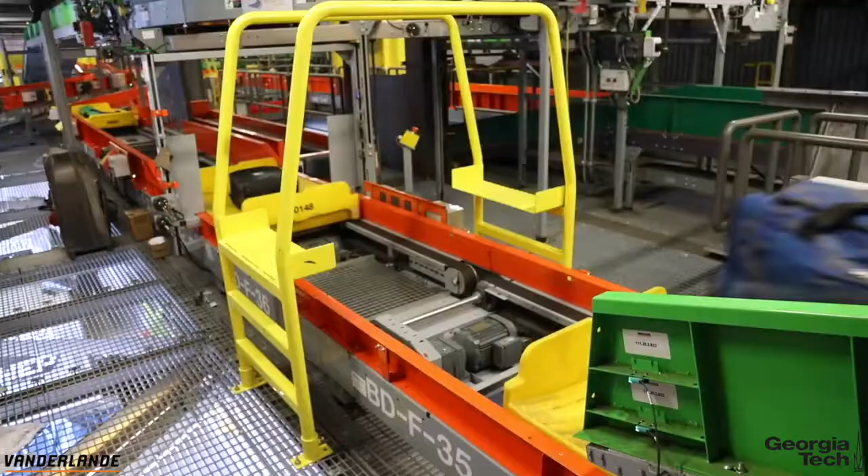Hello, we are Operation Omega, and we're working with Vanderlande, an industry leader in creating logistic process automation via shuttle and conveyor systems. As Vanderlande installs such large transport systems, their process for verifying the structure, components, and throughput can take a long time to complete manually. The process can be accelerated by identifying problems more quickly and reliably.

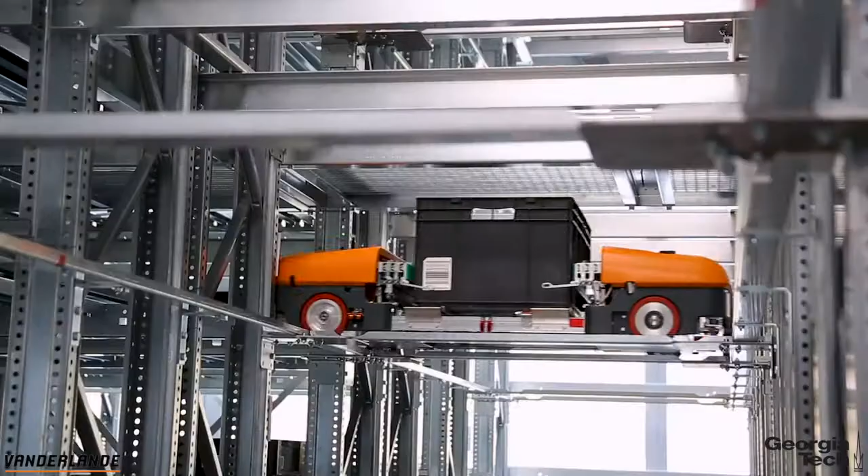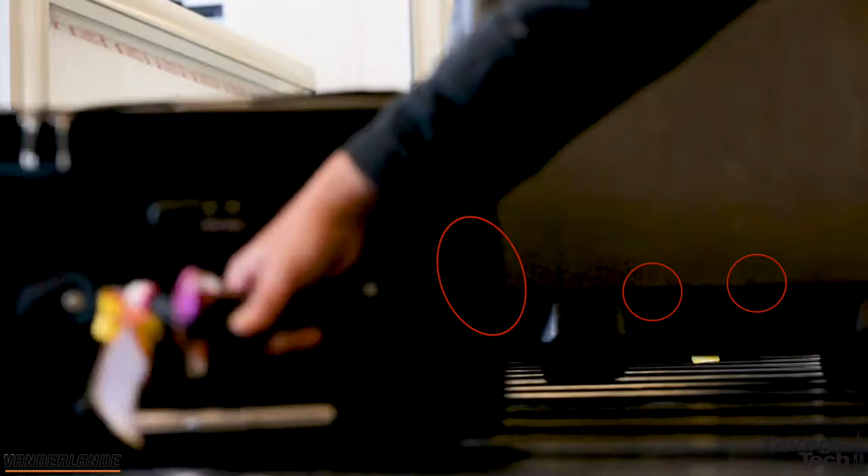For an example of an installation problem that needs to be detected, consider the racking support profiles. One system can have over 100,000 supports, which may be incorrectly assembled up to 1% of the time. This is one problem that needs to be detected in order to speed up Vanderlande's verification. For this reason, Vanderlande desires a more powerful tool, specifically a diagnostic robot, which can move through their structures and assist in quality assurance, ultimately reducing verification time.

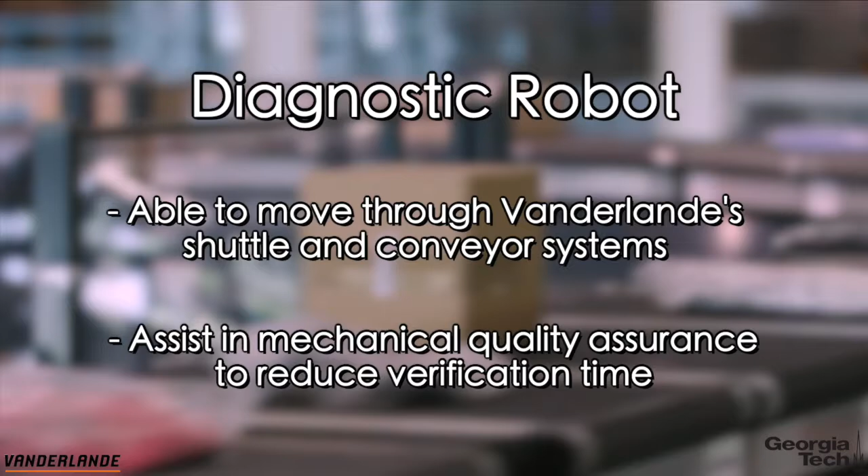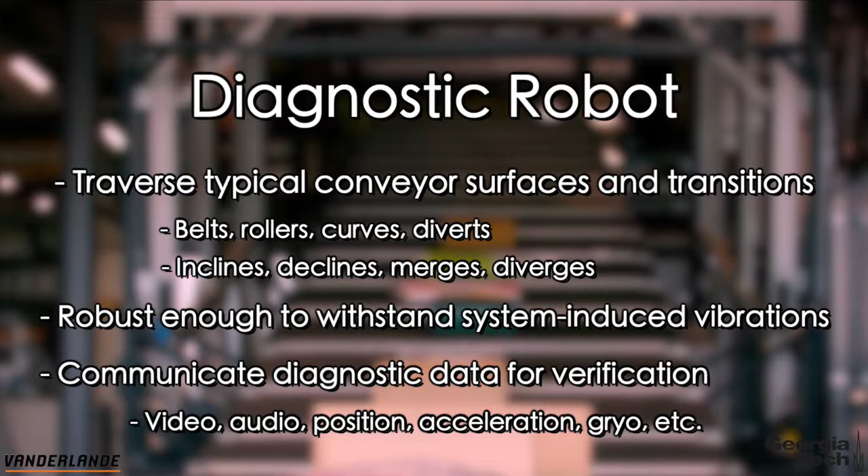This robot solution must be able to traverse Vanderlande's traditional conveyor surfaces and normal transitions, while being robust enough to withstand the vibrations induced by the system. The bot must communicate with Vanderlande operators to provide sufficient diagnostic data, including visuals, audio, position, and appropriate sensors.

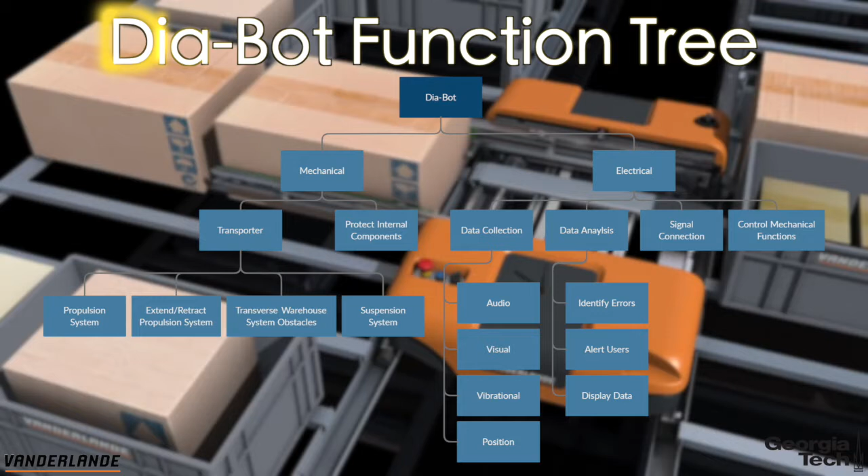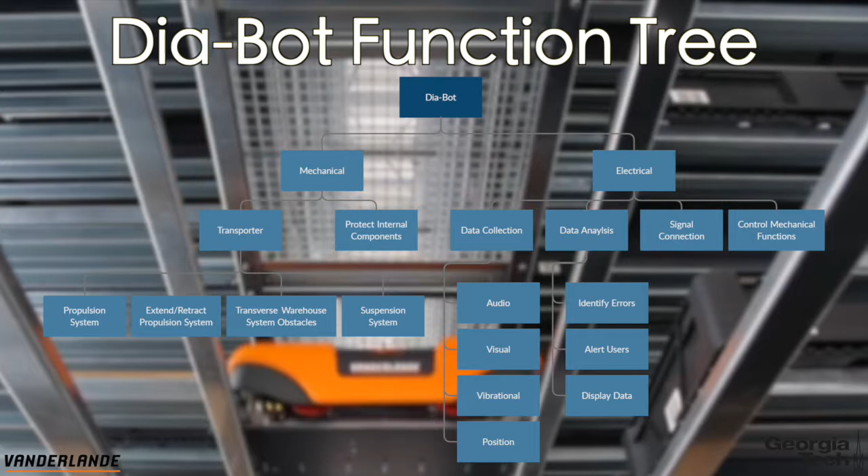To begin design concept ideation, the team first created a function tree to identify the critical functions the Dia-Bot must perform. These functions were broken down into two main functions, being mechanical and electrical. On the mechanical side, two main subfunctions were implemented: the ability to act as a transporter with its subfunctions shown, and the ability to protect the internal components. On the electrical side, the four main subfunctions were data collection, data analysis, signal connection, and the ability to control the mechanical functions.

The design process for the mechanical components began by determining the drivetrains for the Dia-Bot. The two main considerations were continuous track and wheels. The decision was made in favor of continuous track due to the advantage when moving over rough terrain.

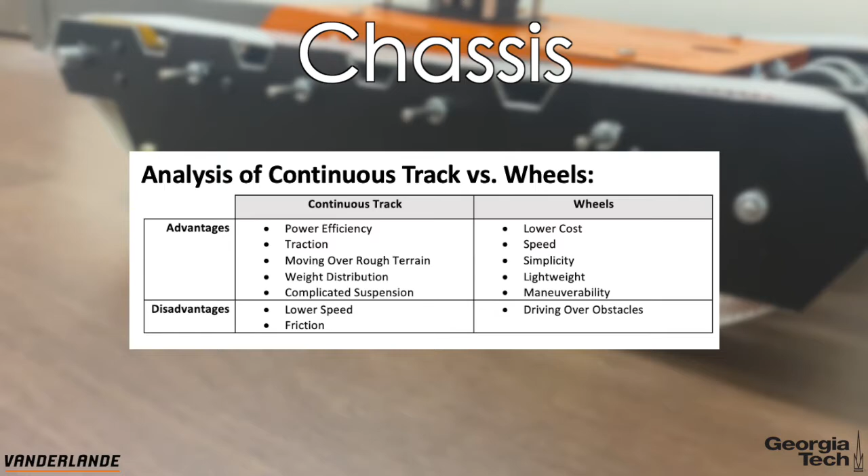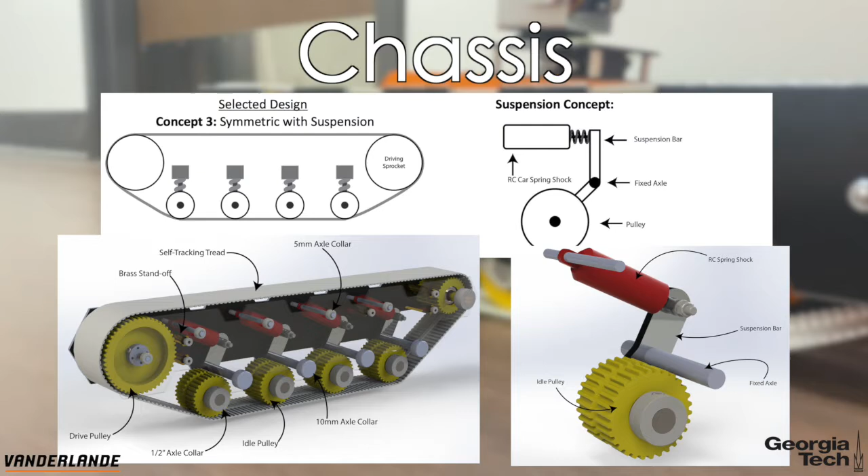Next, a symmetric design with a suspension system was chosen, as our sponsor, Vanderlande, desired for the Dia-Bot to be as versatile as possible. The suspension system works by having a suspension bar rotate around a fixed axle, with one end of the bar attached to the idle pulley while the other end is attached to the spring shock. As a force is applied to the pulley, the suspension bar rotates around the fixed axle and the spring shock dampens the force.

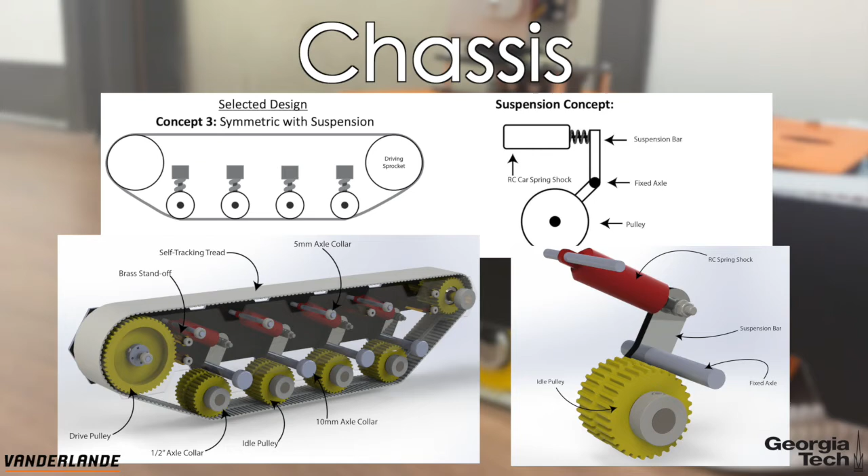For the drivetrain, a self-tracking tread was used that meshes with the pulleys. This prevents the tread from sliding off the pulleys as the Dia-Bot turns. Overall, the biggest challenge for the chassis wasn't the technical design, but sourcing and integrating cheap components so that the Dia-Bot remained under budget.

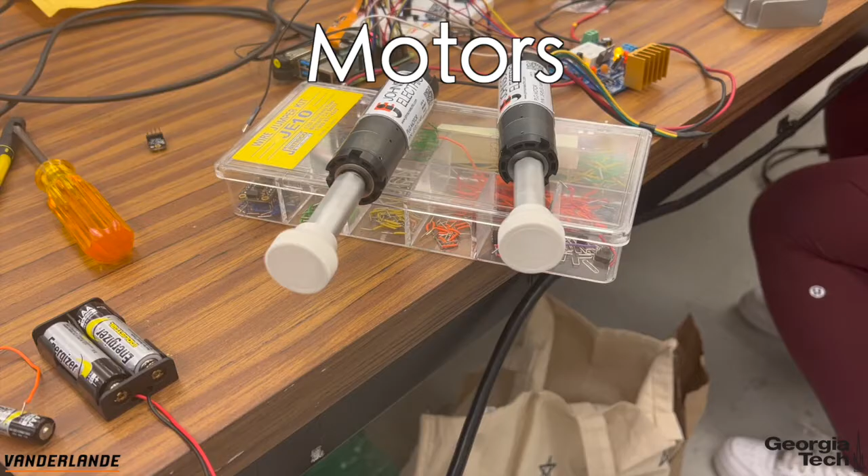The Dia-Bot uses a dual motor design in order to individually drive each side of the tank treads. The motors are set up in a 1-to-1 gear ratio to the axles of the driving sprockets rather than axial connections to avoid interferences between the motors. Given the diameter of the driving sprocket, the motors provide adequate torque and RPM to drive a Dia-Bot of up to 40 pounds at a speed of roughly 2 meters per second.

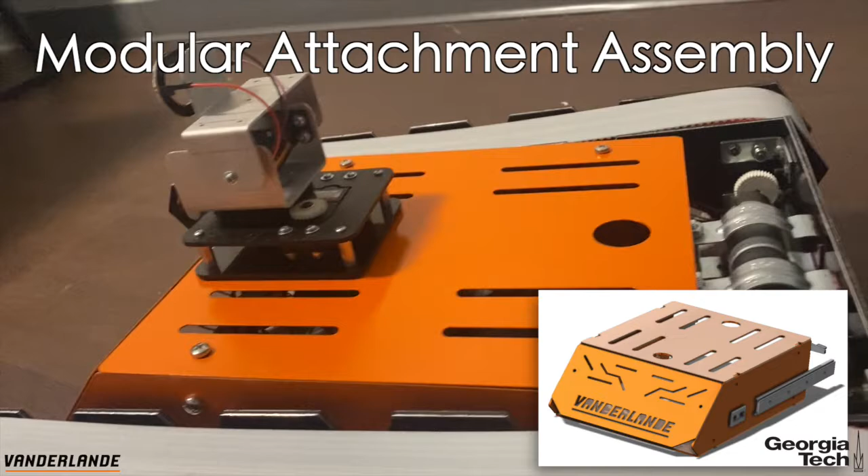For the modular attachment assembly, we went with a backless and vented body. This was to prevent any effects of a possible Faraday cage, as well as vent the heat from the electrical components inside. We went with simplicity as being king for the attachment system, with just a 90-degree turn latch for locking the body, as well as drawer slides, as we saw this as the most user-intensive part of our build.

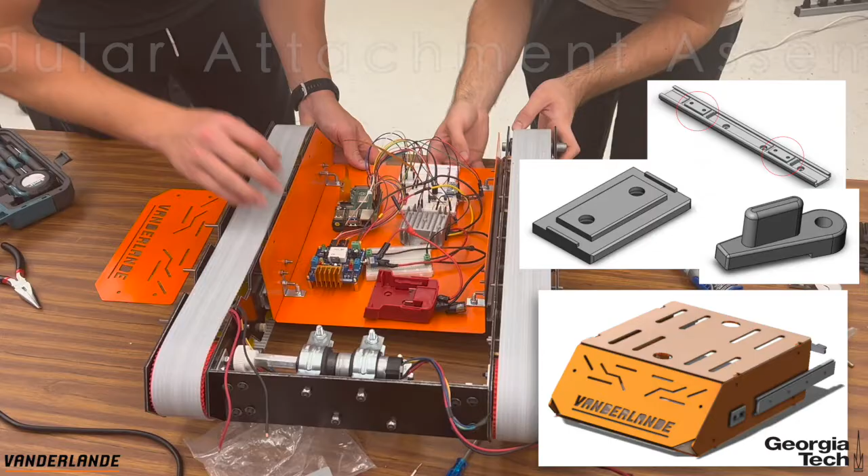Here we have the entire electrical layout. A few main pieces of note include the 18-volt Milwaukee battery, which was chosen because it was easily accessible on the client site. Additionally, the Raspberry Pi was chosen as a microcontroller for the entire system because it can, in real time, collect data from the accelerometer, microphone, camera, and control the motors and LED while sending data out through its own Wi-Fi module in real time.

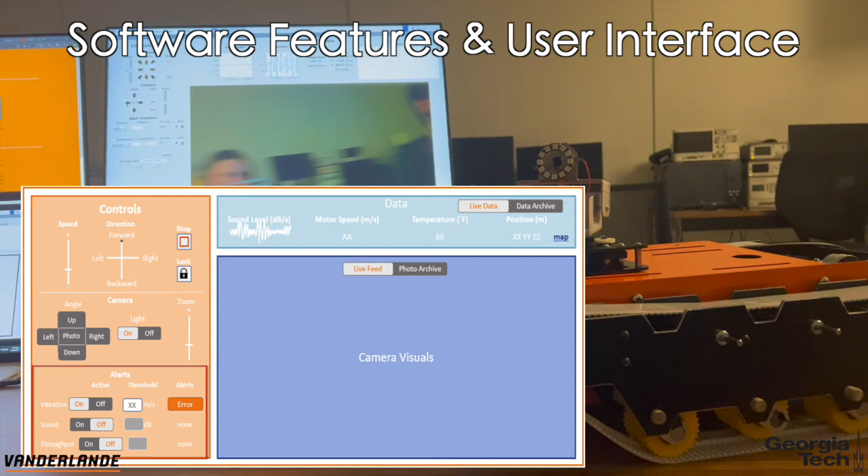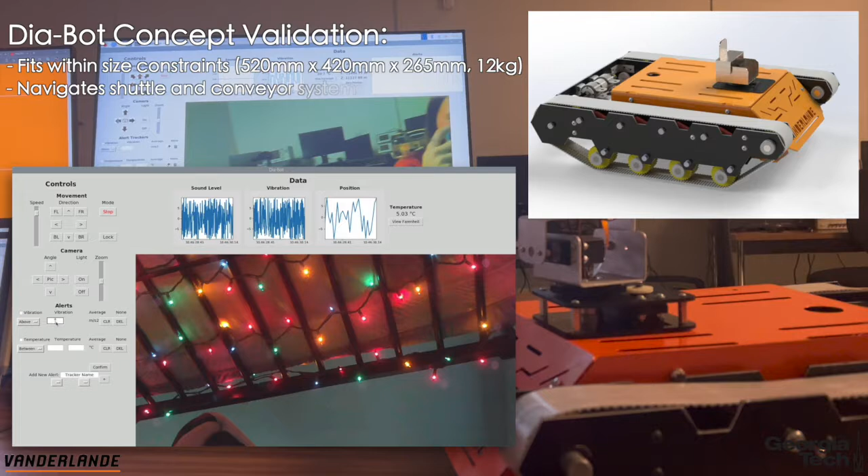The Dia-Bot software and user interface needs to support a few key features for operator feasibility. These are the movement and camera controls, live data processing and streaming, and alerting operators whenever data anomalies are detected. This software, electrical design, and mechanical prototype provide a proper Dia-Bot concept validation. Our physical Dia-Bot fits within the size constraints, can navigate through conveyor systems, provides removable treads for ride-along mode, and is robust against system vibrations.

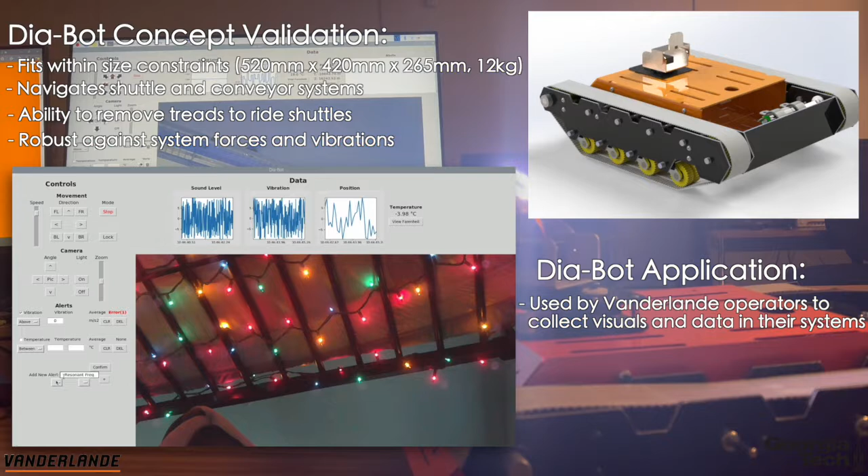Finally, what's the point? Well, the Dia-Bot and the accompanying software can be used by Vanderlande operators to collect visuals and data within their large systems. Errors can be identified and therefore fixed much more quickly, which reduces system installation time.